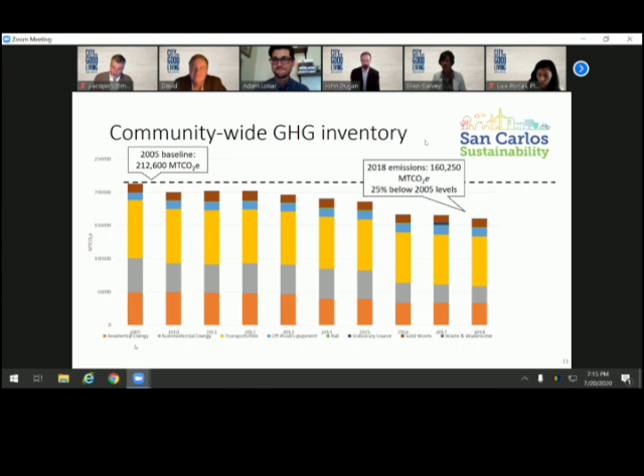Thank you. Adam, Don Bradley here. You can't see me and I can't see you, but I heard you.

Would you just repeat the 2 dates of the public meetings? No problem. Yeah, they are August 26th, which is a Wednesday, and October 1st, which is a Thursday. They're both in the evening at 6:30 p.m. and they'll be on Zoom.

Thank you very much.

Adam, David here. I have a question on the transportation segment, it seems to be holding pretty constant, which considering I gather the city has been growing somewhat over this period, so maybe that's still a good thing. But how much of that is Highway 101 traffic versus local? Is that just vehicle traffic? Is that what transportation means?

Transportation is actually on-road traffic, off-road fuel consumption too, so things like landscaping equipment, and also public transportation is incorporated in that as well. It has to do with how VMT is measured and defined. I'll have to defer to our consultants when we come back to you, they can answer that in more detail as to whether pass-through traffic is considered, or if it's just local emissions. I'm not quite sure.

Yes, it's hard for the city to do too much about the traffic on Highway 101. Exactly, we want to focus on what we have a lot of control over. But I will say our most recent numbers, as you might expect, our vehicle miles traveled from 2005 to 2018 has increased, as you can imagine, with more people and people driving further. But our CO2 emissions have actually seen a drop, and that's largely due to the increased fuel efficiency of vehicles and the adoption of electric vehicles. So somewhat encouraging.

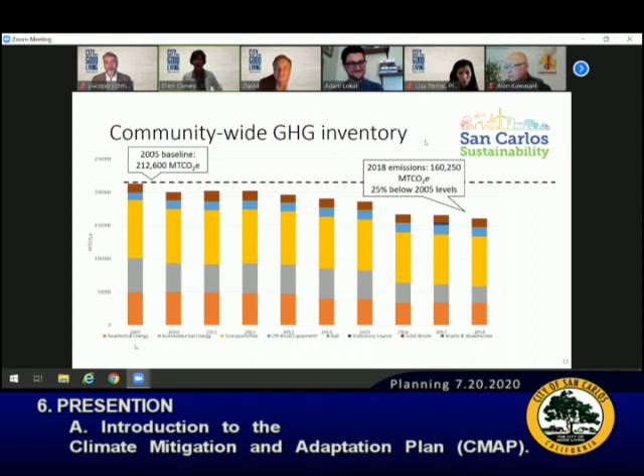Adam, I did get the spotlight in the mail. It's a really nice document. I have a feeling you prepared that, not only a good presentation tonight, but I really enjoyed reading the spotlight. It was really very clear. And yes, I'm looking forward to participating and being involved with the workshops.

Thank you. Any other questions from fellow commissioners of Adam? Thank you, Adam. All right, Adam, thank you very much. Thank you all.

All right, moving on to item number 7. The next item is a public hearing, and I'm going to read the procedure for a public hearing now. Staff will present a report on the history, physical features, etc. on the application, followed with the staff's recommendation. The applicant will make a presentation.

Thereafter, interested members of the community may speak on the proposal. When all interested parties have had an opportunity to be heard, the hearing will be closed and no further discussion from the floor can be held. The commission will then consider the evidence and make its recommendation.

If you challenge a public hearing item in court, you may be limited to raising only those issues you or someone else raised at the public hearing described in this notice, the public notice, or in the written correspondence delivered to the city at or prior to the public hearing.

Speakers should fill out a speaker's form found by the door, although we'll clarify that in a little bit. I think there's a phone process. The speaker should come to the microphone, in this case the phone, to speak since the meeting is being recorded. This will assist staff in preparing the minutes.

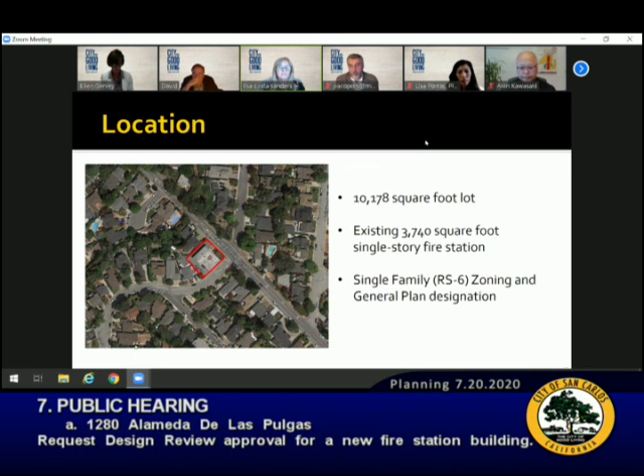The subject site is just over 10,000 square feet in area. It's located at the corner of Howard Avenue and Alameda de las Pulgas. The site slopes upward to the west from Alameda. The site contains an existing single-story, 3,740 square foot fire station. The site is located within the single-family residential zoning and general plan land use designation.

The existing fire station was constructed in 1959 and houses one crew, which includes 3 firefighters on a shift, as well as 2 fire apparatus vehicles. The firehouse is dated and does not meet current codes or needs of the fire station operations. The City Council authorized the project during its 2018-2020 budget process and retained an architectural firm to prepare plans in August of 2019.

The city plans on demolishing the existing fire station building and improvements and constructing a new 5,797 square foot 2-story fire station building. The project complies with the city's municipal code standards and requires design review approval from the Planning Commission.

Here's the proposed site plan. The building is shifted a bit towards Alameda de las Pulgas, and the site will be lowered about 3 feet to the building pad to reduce the grade from the driveway on Alameda, as well as reduce the overall height of the building. You can see that substantial landscaping is retained at the corner, and there's a new entry facing Howard Avenue.

6 on-site parking spaces are provided, including 1 ADA space. A generator is located within a sound insulated enclosure, and the rear parking area and apron is screened from view with a solid fence and gate. A new trash area is also located within a solid enclosure, and bicycle parking is provided near the front door.

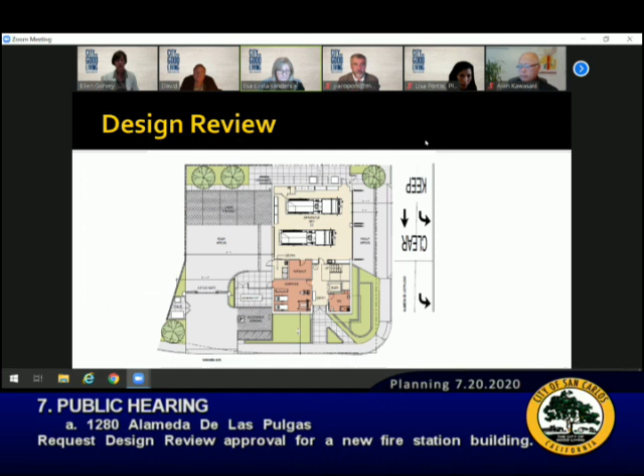The design of the building is contemporary architectural style with a brick base and vertical siding on the upper level, with large eave overhangs and windows with dark mullions. The front door, as well as the apparatus door, are proposed to be glass with red trim. The architect's presentation will review the design of the building in more detail. The project complies with the city's objective code standards and is consistent with the city's design review criteria.

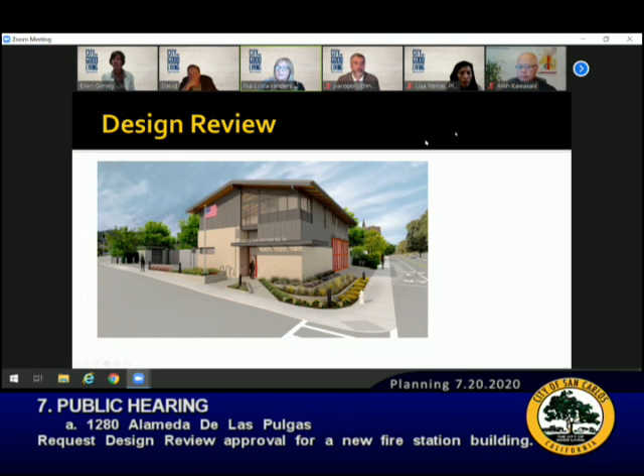The city retained a consultant to prepare an initial study and evaluate the project pursuant to the California Environmental Quality Act guidelines. That analysis determined that the project complies for an exemption under CEQA guidelines 15302, which involves the replacement or reconstruction of structures and facilities where the new structure will be located on the same site for substantially the same purpose.

City staff and the design team held a community outreach meeting in March of this year at the fire station building to review the proposed design. Notification of this meeting was mailed citywide to all residents. We estimate 25 people attended the meeting, which included several immediate neighbors, and comments on the design were generally favorable from the community.

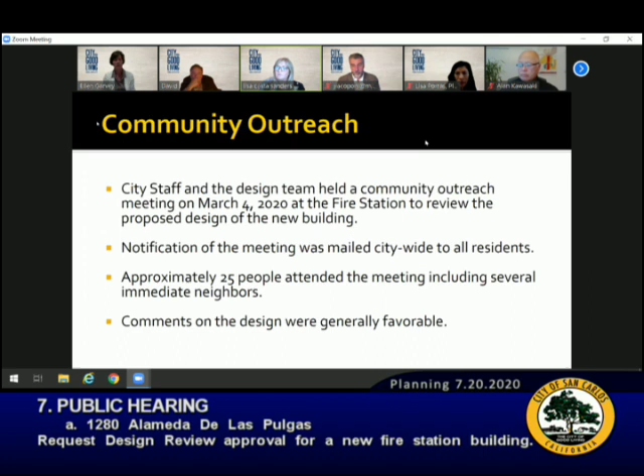Public notice was mailed to all property owners within 300 feet of the site on July 7th and published in the newspaper on July 9th. Staff has not received any comments on the project as of this evening.

Good evening, commissioners. I'm Chuck Lax, your acting deputy fire chief. Could we advance the slide to the next one? There we go. So just a little update on our current conditions with Fire Station 16.

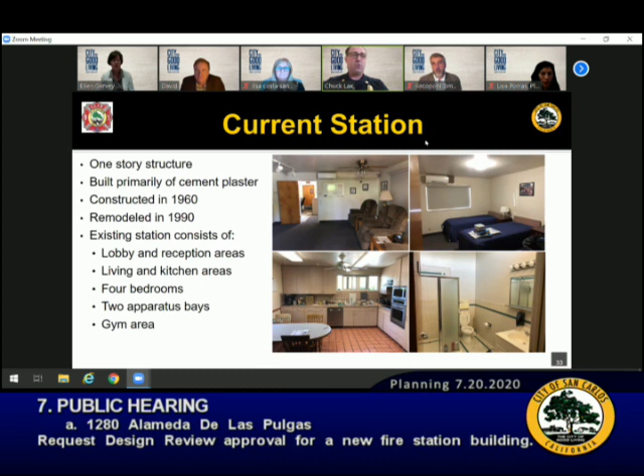Some of the deficiencies with the facility: the structure does not support our current needs. The building is deteriorating and needs significant upgrades. It also does not meet the building codes and seismic standards for a public safety building. The rising maintenance and repair costs for the facility continue to rise.

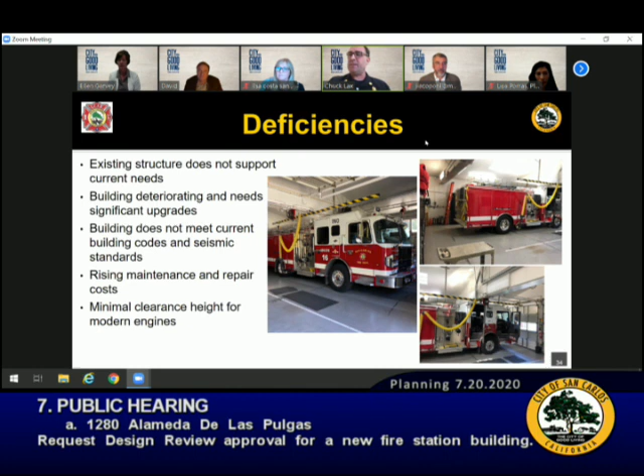Next slide. So to go into some health and safety concerns that we have: firefighters have a higher risk of cancer as compared to the regular public. We're at about a 68% chance that a firefighter is going to have some form of cancer throughout their career into retirement. This has become a very hot topic across the country.

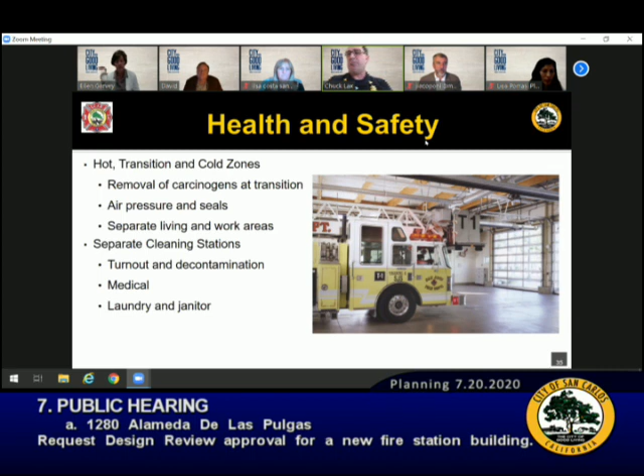What's come out of that is this idea of hot, transition, and cold zones being built into facilities. The building being proposed meets all those standards, as well as separating our cleaning stations where we wash our turnouts, prep our medical gear, do our laundry, and all of that kind of stuff. Next slide.

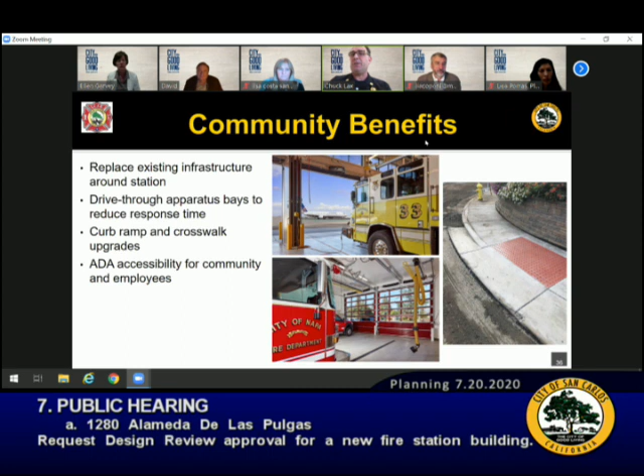Some of the community benefits this project will bring: replacing the existing infrastructure around the station, such as the curb ramp and crosswalk upgrades, as well as a drive-through apparatus bay, which will help reduce some traffic backup. Currently, we need to back into the station, and this will provide some safety for our employees who won't have to get off of the fire engine out in front of the station to back the vehicle in. The new facility will meet all ADA accessibility requirements for the community and our employees.

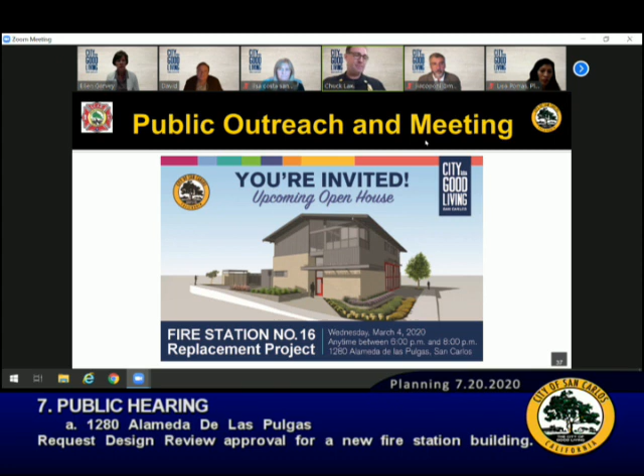Next slide. This was an image of the postcard that was sent out for our public outreach meeting, which you heard some details about already. At this point, I'm passing it off to our architect.

Thank you, Chief Lax. And commissioners, I'm very pleased to be here with you tonight. I'm Alan Kawasaki from Shaw Kawasaki Architects.

The chief mentioned seismic, and I want to start with that. Your new building will meet what's called the Essential Service Act or Essential Service Facility standard. What's happened is buildings that were built before 1986 were not built to withstand a major earthquake. I know that sounds astounding, but in 1986, the state of California, because of our high seismic zone, passed a law that said from that point on, buildings for fire stations or essential service facilities need to withstand a major earthquake. I think that's pretty much an expectation - people believe that if there is a major earthquake, they will still be served by their firefighters.

Well, that's not the case, except for new stations such as this. That's a major point I would make. It definitely benefits the community.

Another feature is this drive-through station capability. As you know, Alameda is very busy, and right now they're backing into the station. What we've redesigned the station to do is be able to come in off of Howard, drive through the apparatus bay, and then go on to Alameda. That's obviously much safer for the public as well as for firefighters.

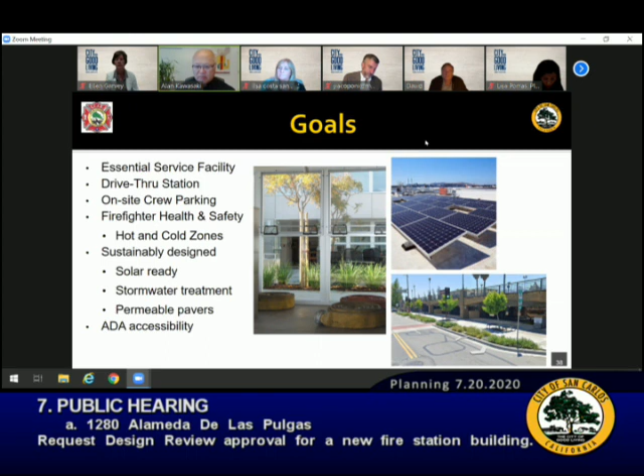Of course, before you get there, there's trash, and there's a generator located to the right. That generator, to the right of the gate, is currently located on the property line. So what we're doing to assist the neighbor is move the generator away from the property line and put it into an enclosure. Then you make a right turn into the apparatus bay, and there are additional parking spaces for the crew.

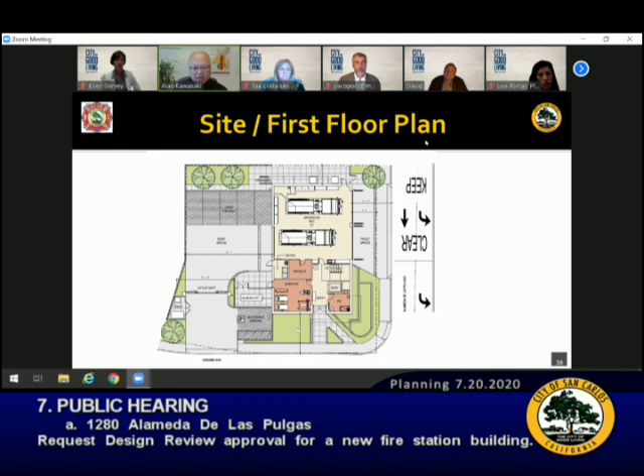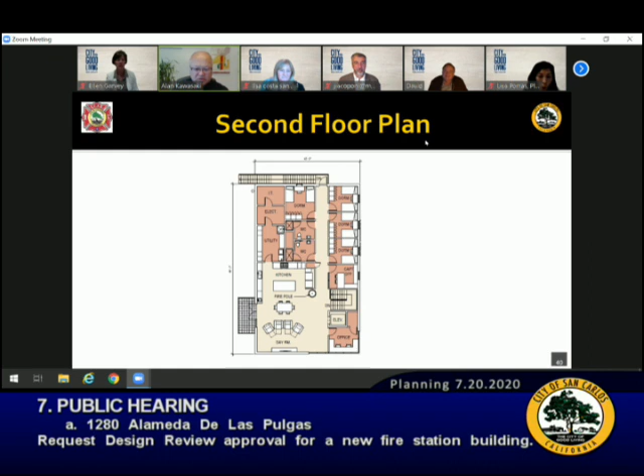That front office, the one in the very corner, let's take the next slide—that's what you see on the second floor here. It actually has a nice view often into the streets.

And what we've done is try to give this a very welcoming feeling from the corner of Howard and Alameda de las Pulgas. And as Lisa mentioned, there is a tan brick base, which makes it very durable, and then highly insulated panels above.

We think of this as a mid-century modern kind of building, a little bit like an Eichler or other buildings of that era. So it has sloped roofs like many of the buildings in the neighborhood, to make a nod to the residential aspect.

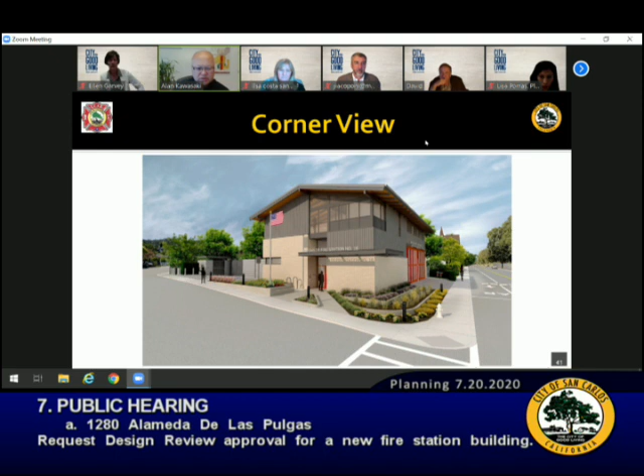This does a couple things for us. One, it reduces the bulk relative to the neighbors. It also gives us a flatter ramp coming out of the firehouse onto the street, which adds safety for the public and the firefighters.

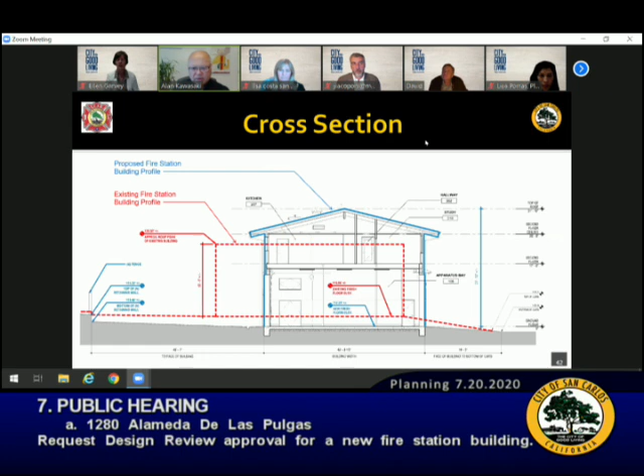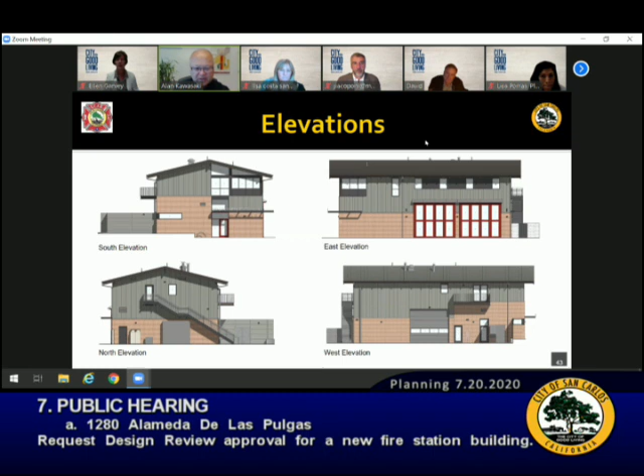Next are the elevations and materials, showing the sides and back of the building, as well as the front you already saw. The materials include brick, metal roofing, and a perimeter CMU that's more of a ground or polished finish. So I think that's it. Thanks.

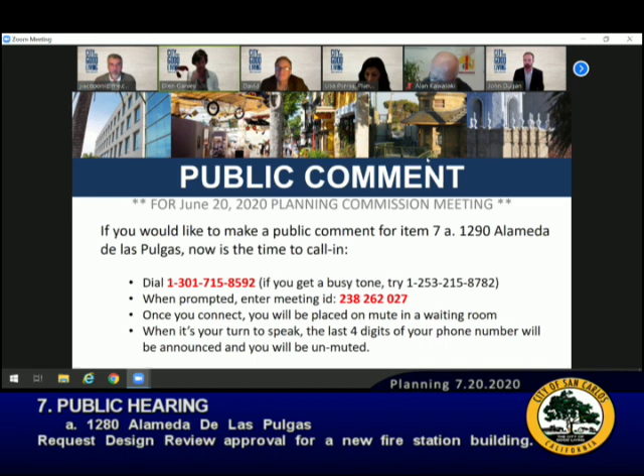We can now, as a commission, enter into discussion. Who would like to start?

Well, I can start by saying I think it's a really good looking building. The design is aesthetically very pleasing to me, and it does reflect its function—the red doors and the flagpole out front. I can't help it, but I was very happy to learn that there's still a fire pole in the building. Somehow that makes me feel tickled. But overall, it looks like an asset to the community, and it's good looking and very thoughtfully designed to upgrade the functionality.

Yes, I would echo all that, and I was surprised to learn that this building has been in use for some 60 years already. So it seems it doesn't meet the code, and I can't see that we would want to do anything but approve it for construction and funding, which the council has to do as soon as possible. Thank you.

Yeah, great, I'll chime in. It's a handsome building. I really appreciate the way the glass has been placed and the emphasis on the corner so that it has a connection to the neighborhood. I always like it when folks like firemen and other public servants can feel connected to their community, and the community can feel connected to them. So I appreciate that approach to the design.